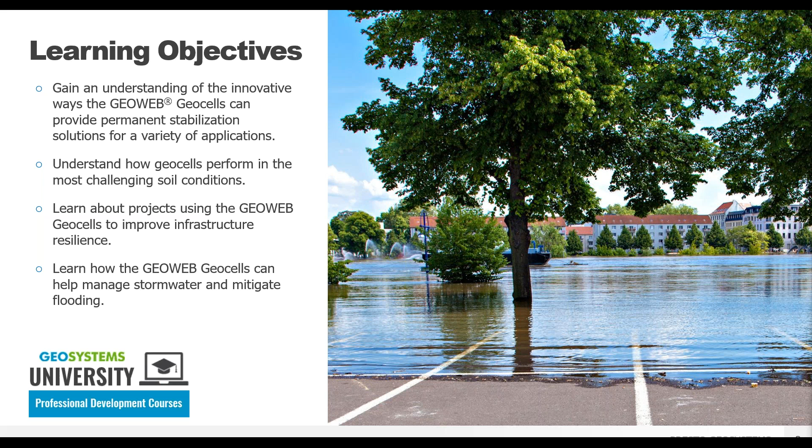Presto Geosystems offers a cost-effective and low-maintenance solution for all of these potential issues using our GeoWeb 3D soil stabilization system. In this webinar, we're going to discuss how to utilize this type of solution to address these types of challenges in your aging infrastructure due to climate change.

We operate in three main product areas: soil stabilization using our GeoWeb GeoCells, which can be used for load support, slope and channel protection, and constructing green retaining walls. We also do porous pavements, which we have both vegetated and aggregate solutions, and lightweight reusable construction mats. Today, we're going to focus on that top line using the GeoWeb GeoCells - that's where we're going to have our focus today.

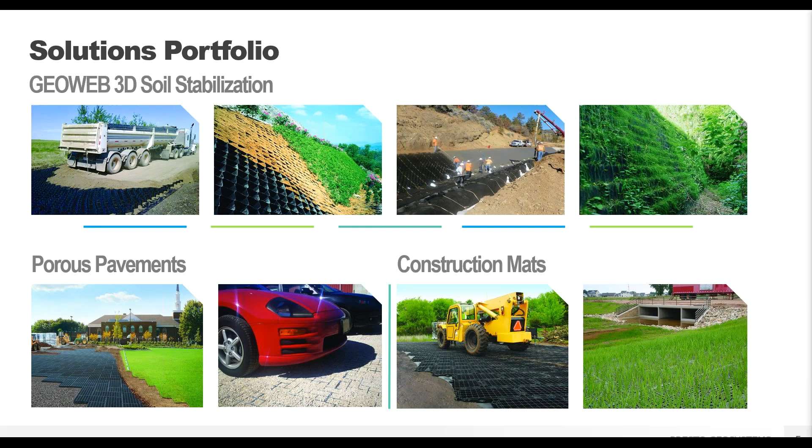We're going to cover some general information about the GeoWeb system, about that type of technology, for those who may not be familiar with this type of product. It's been around for a number of years, but it is still new to a lot of people. The GeoWeb system is our version of the GeoCell technology, and it consists of two main attributes.

The first is the cell or container size. The cells come in three diameters - small, medium, and large opening - with cell heights of 3, 4, 6, 8, and 12 inches. These dimensions will depend on your project-specific details and if you have any specific vehicle loading requirements. We can help you determine which one is going to be the most appropriate for a specific job - there is no one right answer.

We also offer 5 section lengths to best fit your project needs, to give you a little bit of flexibility to make sure that you have full coverage.

The ultrasonically welded seam is where all of the connecting points are, and it's very important to the function of a GeoCell. The stronger the seam strength, the better the performance the GeoCell will have. A strong seam allows for heavier infill material, steeper and taller slopes, and better lifetime performance.

The GeoWeb product is produced using a high-quality virgin, high-density polyethylene, HDPE resin, for consistently strong welds at cell junctions, while also maintaining semi-rigid ductile properties within the cell walls, high stress crack resistance, and overall toughness and long-term durability in any type of environment.

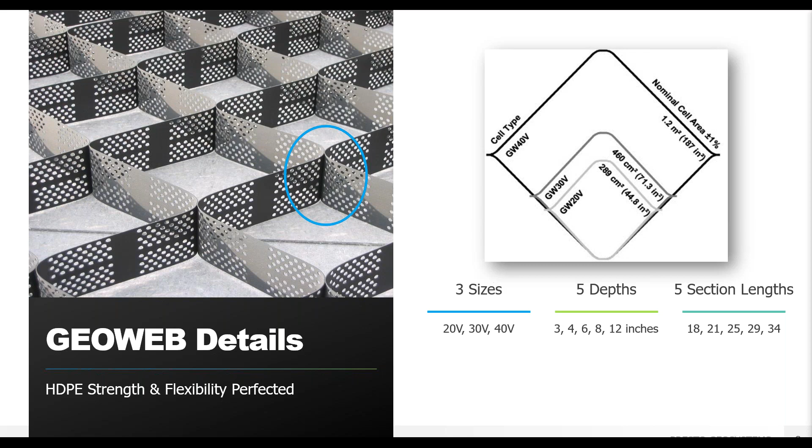Our GeoCells do not use fillers or exotic polymer alloy blends, because those can ultimately reduce weld strength and environmental stress crack resistance, and you don't want that. You want those things to be as optimal as possible. Things like fillers and polymer blends are offered in some competing products in the name of increasing cell wall stiffness, but you want to avoid that because you don't want weld failures or differential settlement. You want uniformity in performance across all elements of a GeoCell system, which is much more important than focusing on a single characteristic like stiffness alone.

So I mentioned there were two main attributes. The second attribute of the GeoWeb system is the infill material, so what you put into the container. An important benefit of the GeoWeb system is that even low-quality aggregates, sands, or certain salvaged on-site materials can be used to infill the cells. Using an on-site aggregate or sand can save significant money, material, and hauling costs.

You can also eliminate the fine content of your material when needed, since the cells provide confinement and aid in compaction of cohesionless materials. Without the fines, you can significantly improve drainage through the system and let water flow freely, preventing pore pressure buildup and potential global failure across the cross-section.

The ability to use sands or other low-quality aggregates really sets the 3D GeoWeb system apart from things like planar geogrids and geotextiles. Those products require high-quality materials with high friction angles to achieve optimal performance. With the GeoWeb system, low friction angle materials are just fine. The GeoWeb panels will still achieve their full potential even when poor materials are used, so you can have some pretty big cost savings there as well.

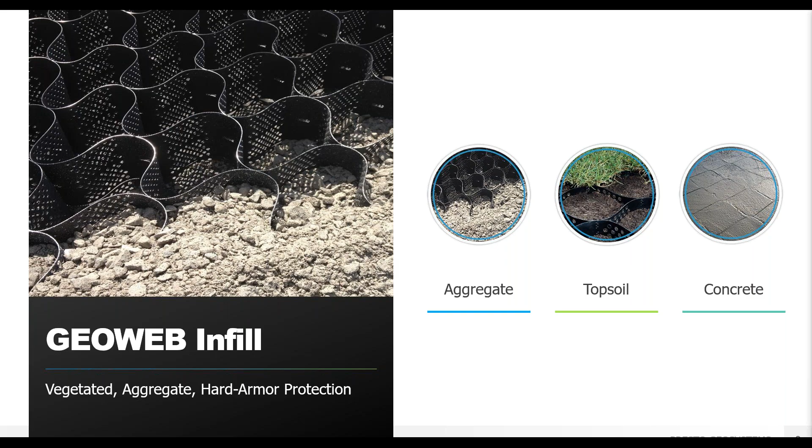So we're also going to have some system components. These are all the supporting pieces that help the GeoWeb panels protect your roadway, base layers, slopes, retaining walls, and so on. They also ensure relatively uniform performance across the whole interconnected system, protecting against non-uniform deformation and differential settlement in response to applied loads.

If we think back, I mentioned the panels, and the thing you want is full coverage. You don't want any gaps in your project area that you aren't anticipating. So to do that, you need a connecting device. We use our Atra key. It's the first component in a completely integrated system, connecting each individual panel of the GeoWeb into a single web that covers your entire project site.

It allows for faster installation of the GeoWeb panels and lasts the lifetime of the project, ensuring your roadway or slope is protected and the GeoWeb system doesn't fail under anticipated loads. The specific engineering values of the Atra key ensure the system holds up to loading over time without the corrosion seen in metal staples or the failure of underperforming cable tie systems.

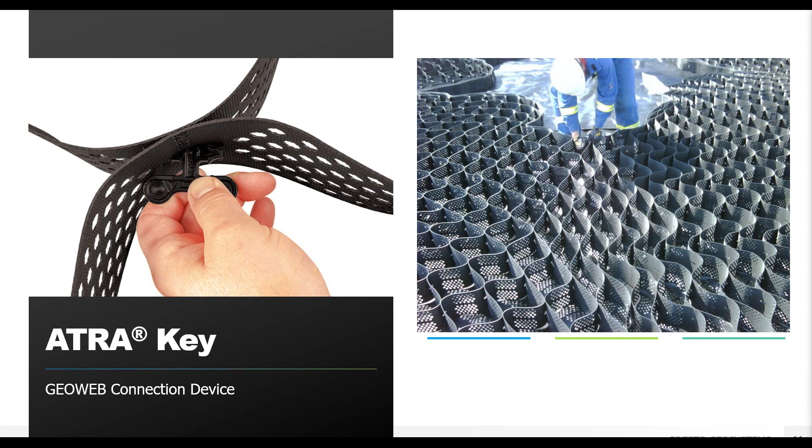There is a specific Atra key called the Atra wall key for a completely integrated earth retention system. This is what we use to connect adjacent GeoWeb retaining wall sections through the material eye slot. This is specific to retaining wall applications, whereas the standard Atra key is for your load support, slope, and channel protection applications.

The Atra wall key includes an integrated washer at the base of the handle for coverage and has frictional barbs for improved interlock with the GeoWeb sections. It's formulated to withstand weathering and ultraviolet radiation, which means it can be exposed to the environment, it doesn't need to be buried or hidden. It won't corrode or photodegrade, even in harsh environments. Securing sections with the Atra wall key is a lot faster than using metal staples or zip ties, requires no special tools, and can be completed by a single installer in one easy turn.

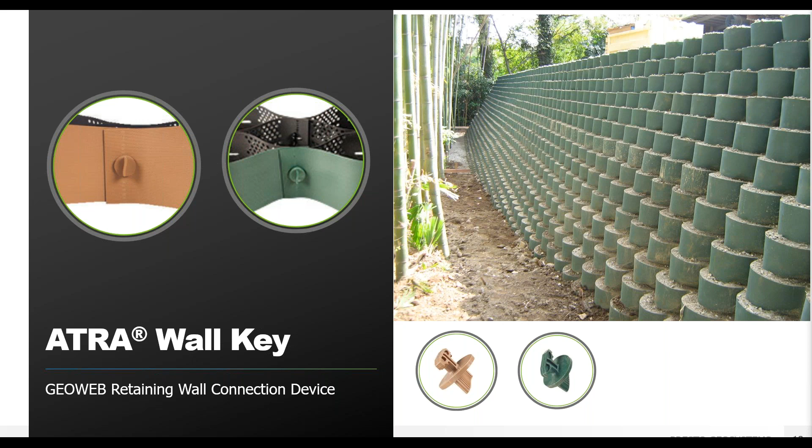So that's how to connect all of the individual panels. But if you need to go on your slope, if you have your channel with some side slopes, you're not necessarily going to have a flat geoweb on the slope. So you're going to need anchorage to hold it in place so that it doesn't just slide all the way down your slope and therefore not protect anything.

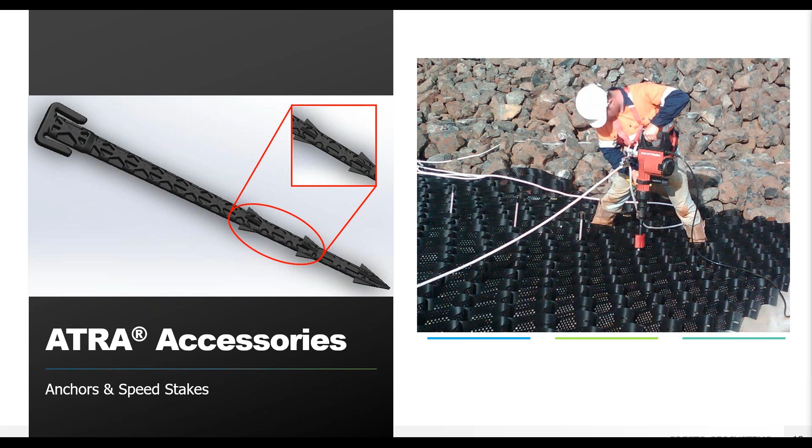But a lot of times you are gonna have steeper slopes. You can have slopes all the way up to a 1-to-1, so 45 degrees, sometimes even steeper than that. And also sometimes you are going to be over a surface that can't be punctured. So if you have a geomembrane liner down on the slope, you obviously aren't going to want to drive a stake through that. It's going to defeat the purpose of the liner.

So in those cases, you're going to use a tendon anchored system. And we have our Atra tendon clip, which is a load transfer device to carry the load from the heavy infill materials that you would choose to the tendons and then up to a crest anchorage system. So only the Atra tendon clip is specifically designed to fully transfer safely and securely the forces placed on a geocell.

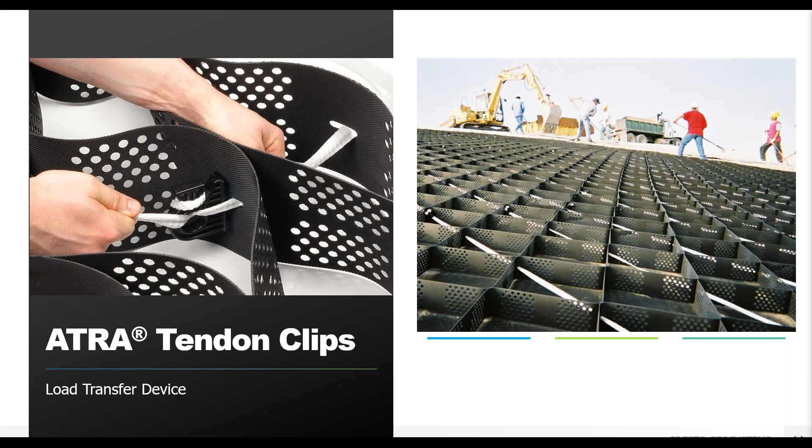Every accessory that we have has been designed and tested specifically to work together with the GeoWeb panels so that we can go from problem to design to construction solution with a system that really models and replicates real-world forces. And so in order for a geocell system to perform uniformly, which is kind of the key word that I want you to take away from all of this...

It's critical to have both factory welded junctions, those internal points, and then also field joined junctions that connect the individual panels, so the mechanical junctions. And those have to perform at a level that's commensurate with the cell walls. So it's three primary elements: the cell walls, the internal junctions, which are those ultrasonically welded seams we looked at, and then the connectors, those Atra keys, we talked about those as well, must perform uniformly as a complete system.

Therefore, an incremental improvement in a single characteristic, such as cell wall stiffness, is only going to be valuable if a complementary improvement has been made in the other components within a system. So you can't just prioritize one over the other.

The GeoWeb system is going to be manufactured with that high quality virgin HDPE. Our proprietary formula has stood the test of time for more than 40 years, and it's going to be more than adequate for pretty much all typical sites. It can have a durability of greater than 50 years, with lab testing indicating more than 150 years without degradation, even at full exposure to the elements.

So we stand behind our numbers so that you can deliver certainty in a solution as you build with materials that you can trust. Additionally, for those who are in the United States, the GeoWeb and all of our products and accessories are 100% made in the USA. So if you are working on something like a federal project that has Buy America or Made in the USA requirements, all of our products do meet those standards. Just something to keep in mind.

Okay, so now we're going to move on to discussing our soil stabilization capabilities with the GeoWeb system, specifically how they can relate to load support applications. Presto Geosystems offers solutions for many different types of road and highway applications, load support for both unpaved roads, road shoulders, and base stabilization underneath paved surfaces.

Plus, stormwater control is going to be possible when using the GeoWeb geocells through roadside ditches, drainage channels, and culvert outfalls. So the purpose of cellular confinement is very simple: it stabilizes the movement of unstable soils, both horizontally and vertically. The weaker your subgrade conditions, the more practical it becomes to insert the GeoWeb system into the design.

It's an engineered system integrating multiple types of geosynthetics with the best method of confinement and subgrade stress reduction in the industry. And so although today's discussion is going to focus on the GeoWeb system for roadway infrastructure, other load support applications include things like intermodal yards for heavy equipment and container storage, and rail ballast reinforcement for railways.

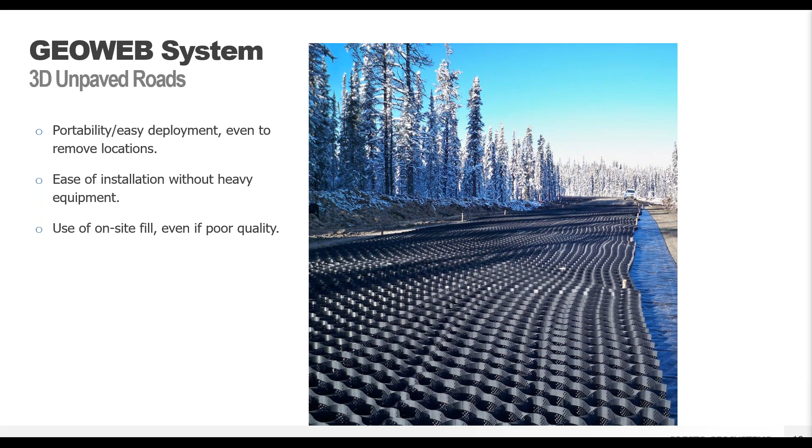So there are lots of applications that we're not specifically talking about today, but that we do cover.

So the GeoWeb 3D system works like this. When a vertical load is applied, the active earth pressures in the loaded cell push back against the passive earth pressures in the adjacent cells to form a stable system. Being confined, the soil responds passively. The infill is limited in its movement, represented by the yellow arrows in the center, and the cells adjacent to the loaded cell provide passive resistance, shown by the red arrows pointing back in. The load is dispersed over a greater area in the lower layers as each cell helps support the one around it.

The GeoWeb cell walls also transfer hoop stress, which is important in keeping the system intact and creates what we call the mattress effect. The strength of the seams around each cell, the ultrasonically welded seam we talked about earlier, plus the material properties of the individual strips, the HDPE resin, and the connection method, those ATRA keys, are all important factors in determining how the GeoCell system can improve load bearing capacity. Strong seams, semiductile resin properties, and integrated connections are all critical to a well-performing system.

The GeoWeb system plus its accessories are specifically designed to work together as an effective, permanent solution for roads in soft soil conditions. In a load support scenario, vertical deformation can only occur through compression or compaction of the soils, or through lateral movement of the soil particles. By spreading out the load, the classical granular fill approach can reduce the compaction of near-surface soils, but only with the cellular confinement of the GeoWeb panels can you assure there's no lateral shifting leading to ruts. This mattress effect reduces the stress reaching your subgrade.

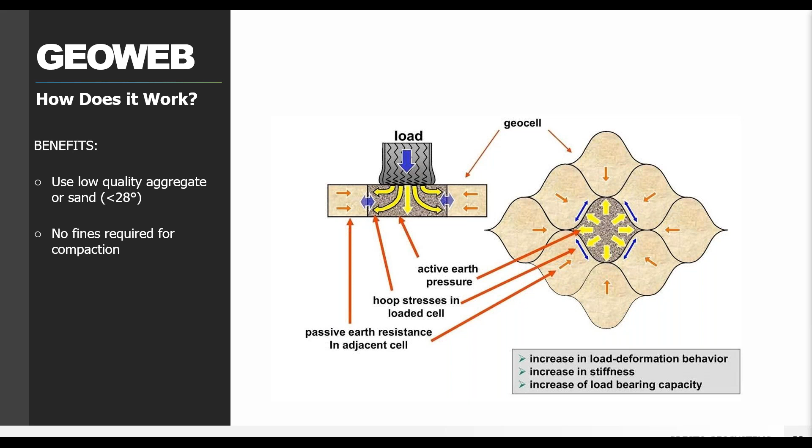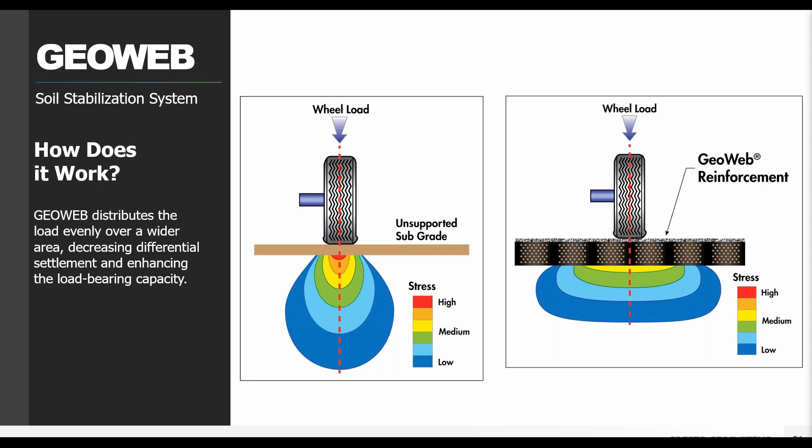And here you can see that. So the stress is on the subgrade, with the unsupported subgrade on the left, and the GeoWeb reinforced system on the right. Notice the complete elimination of the highest stresses at the surface with the GeoWeb reinforcement. The stresses are reduced and distributed over a wider area, and this mattress effect reduces the stress reaching the subgrade, leading to a significant decrease in deflection and rutting.

By eliminating lateral particle movement, because the infill material is confined within the cells of the GeoWeb panels, the GeoWeb system can stabilize the surface, reducing or even potentially eliminating the need for constant surface maintenance.

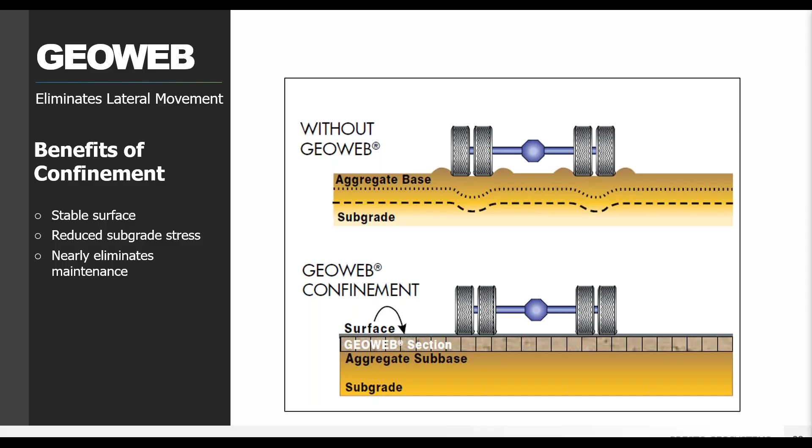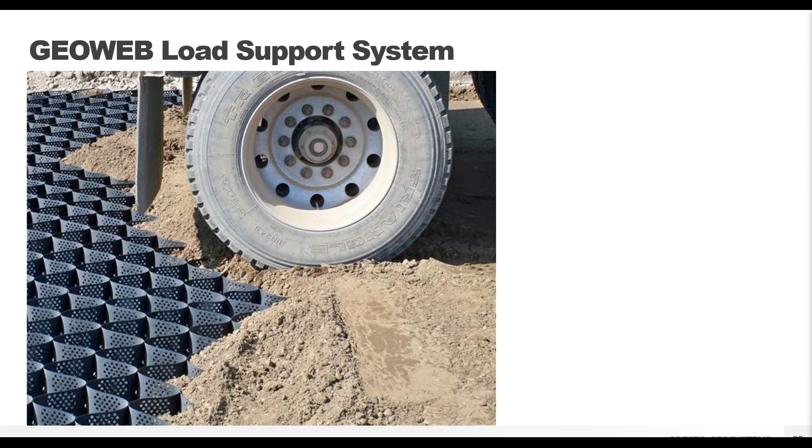The GeoWeb system is often compared to 2D geotextiles or geogrids, and they do start with the same concept. However, due to the 3D nature of the GeoWeb system, it has that defined depth. The integrated infill geosynthetic system acts as a composite layer where lateral earth pressures are mobilized and transferred across the three-dimensional network of interconnected cells.

So again, mattress effect. Because of this phenomenon, lower quality fill materials, like sand or salvaged material from your site, can be beneficially reused, eliminating the need to import expensive aggregates as required with geogrids. The GeoWeb system also uses a thinner cross-section. Typically, a 6-inch GeoWeb system is equivalent to a 12-inch geogrid system, which can require 2 or more layers of geogrid depending on how soft the native soil is.

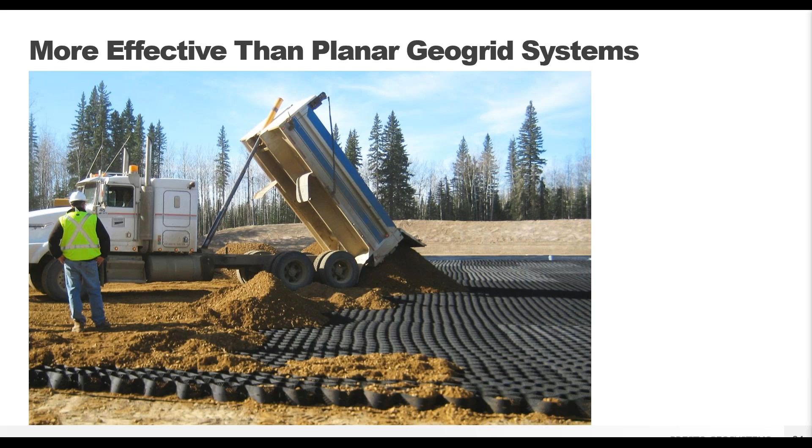We can also eliminate fines when desired, since the cells provide confinement and aid in compaction of cohesionless materials. Without fines, you can improve drainage and let water flow freely. Additionally, geogrids do very little to actually stabilize the surface of your roadway, so they require significantly more maintenance since the aggregate is loose at the surface and can get pushed around by vehicle passes. That's exactly what the GeoWeb system prevents with its confinement.

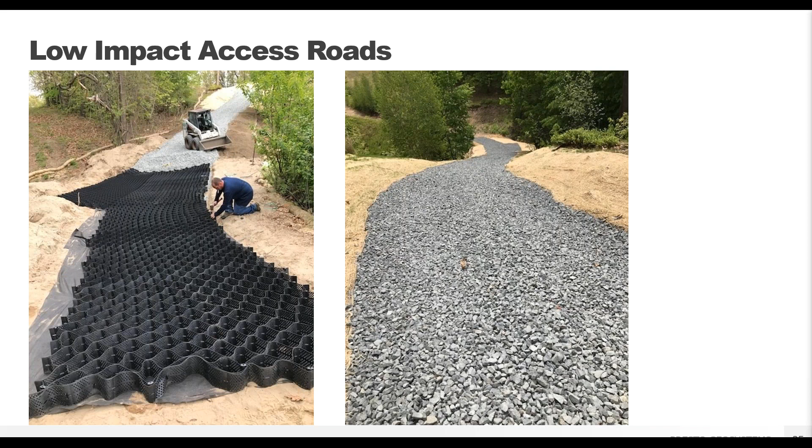Continuing with the theme of unpaved gravel road surface applications, washed or clear stone can be used in the GeoWeb system, allowing you to build stable, permanent, low-impact development access roads. Site access roads, both temporary and permanent, are very common applications for the GeoWeb system. Heavy vehicle loads can drive on the GeoWeb system immediately after infilling to finish construction, so it's a pretty big time saver. With the GeoWeb panels and a woven geotextile underneath, which is what you see here, you can actually bridge wet, soft ground, creating access roads with little to no disturbance.

Saturated soils usually can't support any type of vehicle load, and woven geotextiles can't do it alone. They do add additional strength to the system, and they won't get clogged by your subgrade material, so they still allow for water movement to go through freely. The clear stone infill combined with the perforations in the GeoWeb cell walls allows water to flow both vertically and laterally through the system, limiting impact in sensitive environmental locations in ways that a paved asphalt or concrete road can't.

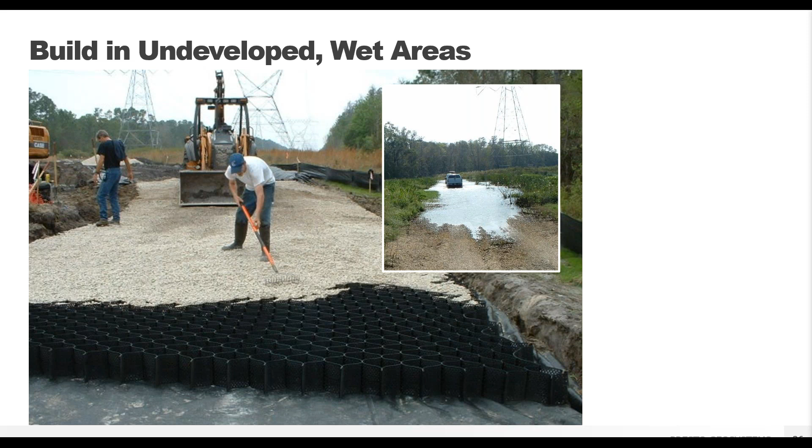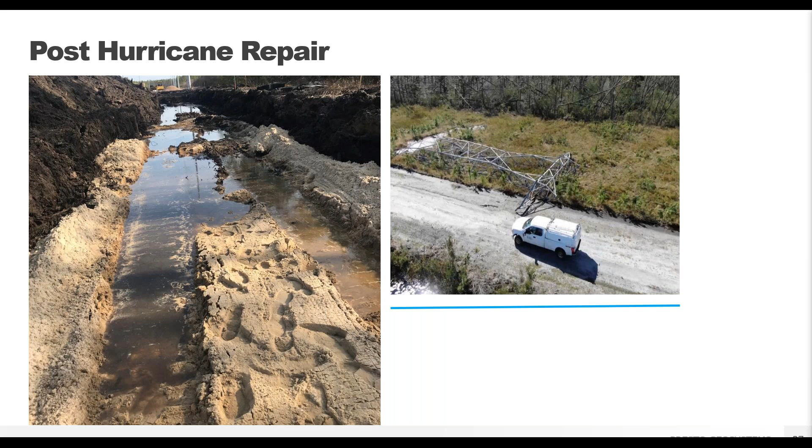This was a project through the Duke Energy system in Florida to install new transmission towers through wetlands. High winds from Hurricane Michael had demolished over 100 towers in this line, all of which had to be restored over extremely soft subgrade. You can see how easily people were sinking in with deep footprints—imagine vehicles going through. So the GeoWeb system was used for access and maintenance roads, as well as building up pads around each tower.

The saturated sand really couldn't support any type of vehicle loads on its own, so a combination of woven geotextile and the GeoWeb system was used. This allowed water to still flow freely through the wetland system, limiting environmental impact. We were then able to use sand from the local site—low quality material that you typically wouldn't get to use with a GeoGrid, but you can use with the GeoWeb system. It was easily sourced and transported to these remote locations without needing to bring it from far away from a batch plant.

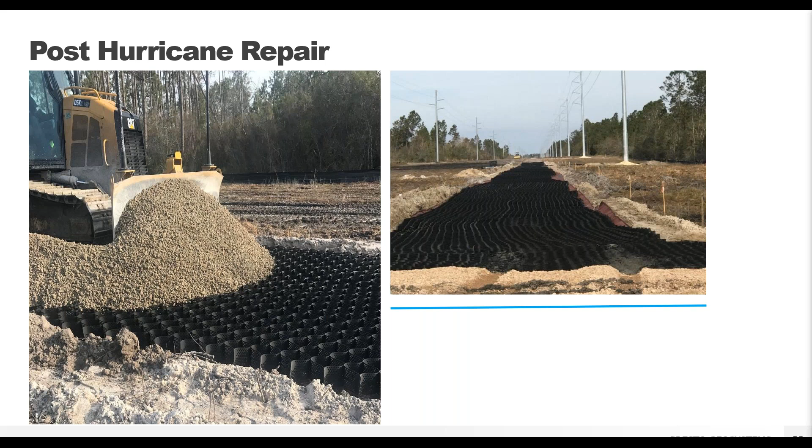Once the panels are filled in, both wheeled and tracked equipment can drive over the GeoWeb system quite easily, even when the infill material is sand, which you normally wouldn't be able to do. Again, you can see how the GeoWeb panels act as their own access road—just keep filling up the cells in front of you. You don't need to build temporary roads around it; just use what you already have.

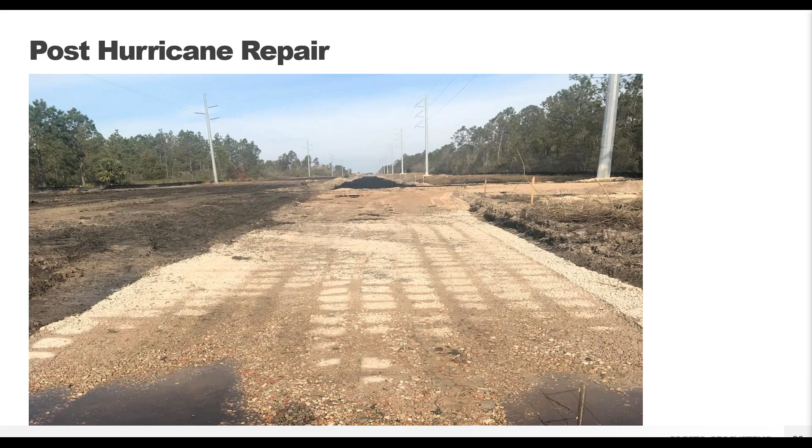Now we're going to move on to embankment stabilization using the GeoWeb system. Many times slopes and embankments need to be stabilized after or in conjunction with road and highway construction. The GeoWeb system for slopes can be filled in with a couple of different materials depending on your project needs. Topsoil with vegetation is probably the most common, but sometimes vegetation is not appropriate, so you can also use stone or concrete as your infill options.

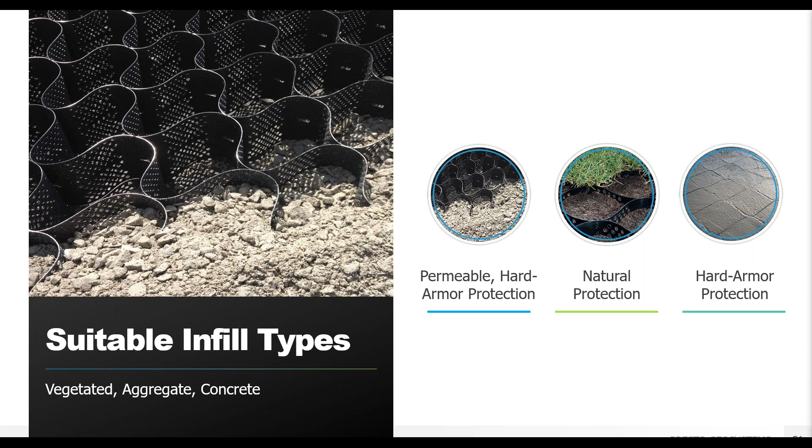As shown earlier, there are a couple of different options for anchoring. You can use stakes if you have a shallow slope, or tendons if you have a really steep slope, or if you've got a geomembrane that you can't puncture. When using tendons, you have to have crest anchorage, typically a dead man pipe or earth anchors. But if you have infrastructure right at the crest of your slope, such as a building or roadway, you can also anchor to that infrastructure if it can support additional load. That's very project specific, and we can help you determine what's most appropriate for your site.

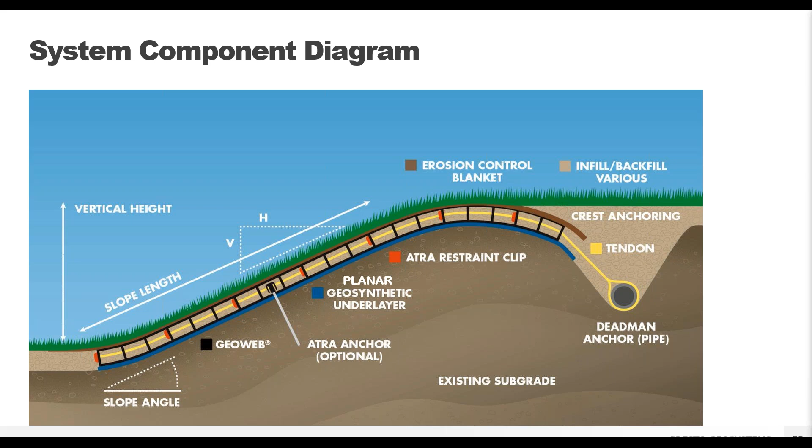So the GeoWeb panels work in multiple ways to protect your slope surfaces. It prevents significant movement of the soil by confining it to individual cells. By separating the soil into those smaller segments, the system resists mobilization of the entire slope face due to hydraulic loads and prevents soil erosion.

It's important to reiterate that proper installation of the GeoWeb system includes embedding the panels into the crest of the slope. This prevents water from flowing beneath the panels and undermining the system. You don't want rills or gullies forming underneath the panels where you can't see them, potentially leading to failure.

The system provides a way to fully vegetate slope surfaces that otherwise could not support sustainable plant life, increasing overall slope stability by interlocking with the vegetated root zone. Stone or concrete materials can also be confined within the GeoWeb panels, again on slopes that might normally be too steep to allow for natural vegetation or natural stone slopes alone.

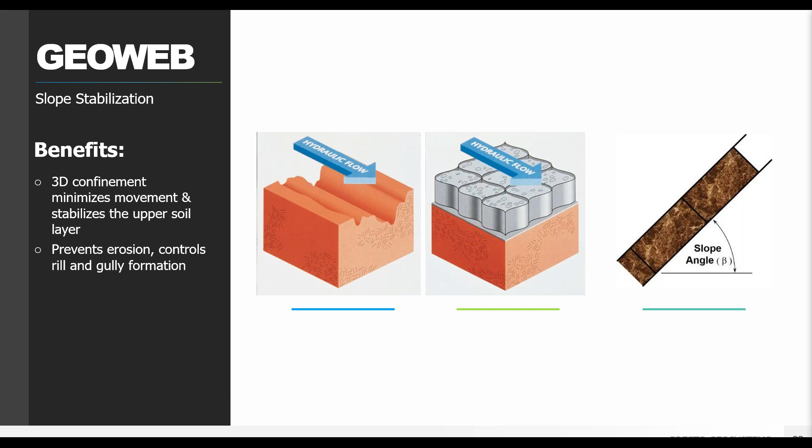Vegetated slopes are probably the most popular option because they can result in the most attractive slopes, and typically they would have little to no maintenance.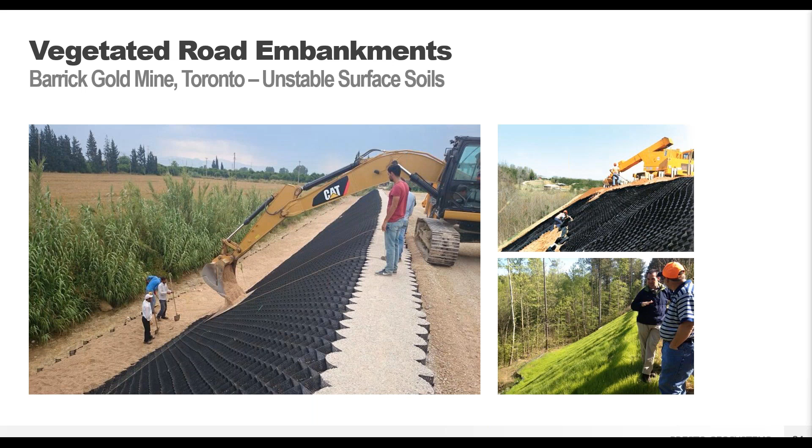Always a positive. So this was a vegetated slope over an unstable soil slope at an active gold mine in Canada. With variable slope lengths and face angles, it required a flexible solution. Plus, an access road was going to be built on top of the slope, where you see the excavator here. So the slope had to be stable enough to support the expected traffic live load. A couple different things needed to be considered.

Here you can see that there were also space constraints at the top of the slope in the form of that access road, plus potentially an access road at the base of the slope.

You can also install things like fences, rail posts, and other small infrastructure directly through the GeoWeb panels. That's a nice bit of flexibility and customization that you have with the GeoWeb system that you wouldn't necessarily have with other types of systems.

Plus, now you have a steep slope that otherwise probably wouldn't have been able to withstand on its own, fully vegetated, and it's going to withstand the test of time and heavy rain events.

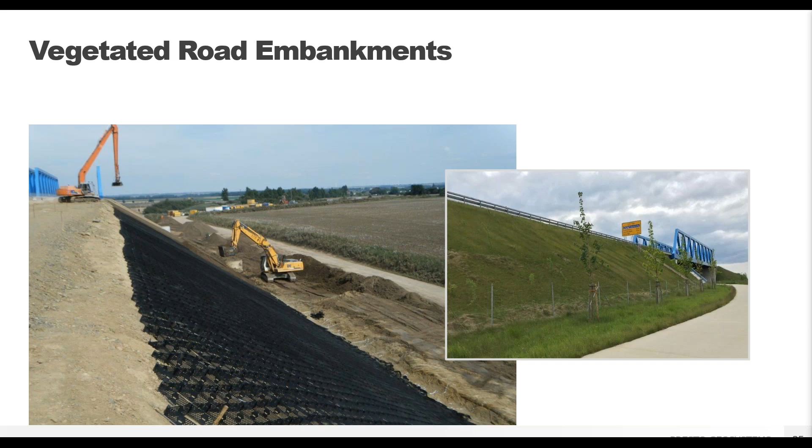This was a slope alongside a road in Ohio, which shows a pretty common problem solved with the GeoWeb system. Erosion and washout of soil slopes onto your road surface is going to be a problem in many locations.

Covering the slope with the GeoWeb system and then filling it in with topsoil allows for a vegetated slope without the concern of constantly having to replace the soil after storm events.

We do recommend some sort of surface protection, such as hydroseeding or using an erosion control blanket, be used over the GeoWeb panels until vegetation has had a chance to grow. It just gives you a little bit of flexibility until that grass starts coming in.

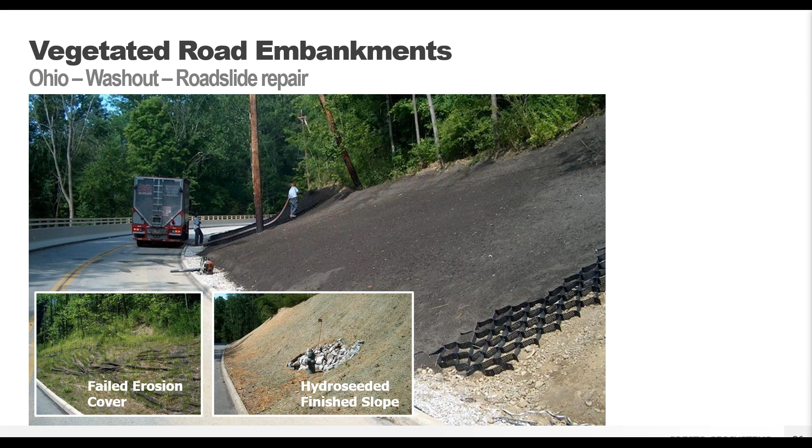The sheet flow off the roadway can cause sloughing of large sections of the upper topsoil layer, causing deep rills or gullies and preventing vegetation from taking hold.

The GeoWeb system holds that soil in place while allowing the water to run over the surface. So no more gullies, and now vegetation can form those deep roots to help further stabilize the soil.

Sometimes you just have so much rain, the rain events are so common, vegetation never got a chance to establish itself, even if it normally could have.

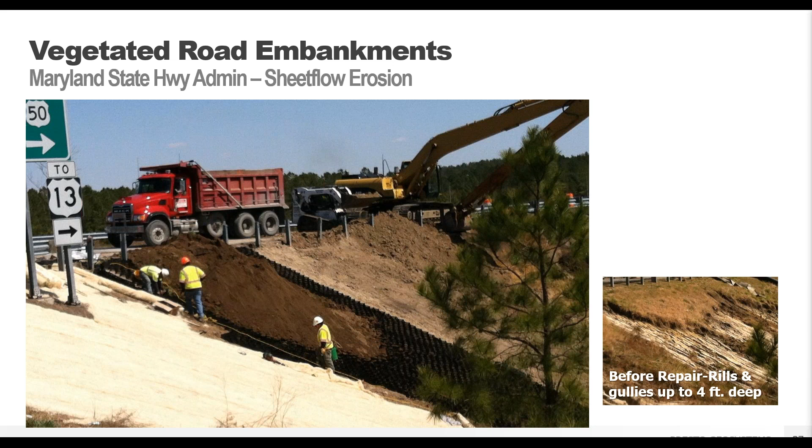With the GeoWeb system, it gives that extra strength and protection against that water flow movement, letting it grow and really get those roots deep down to get you a nice stable slope.

The GeoWeb slope protection system allows for steeper slopes to be created than normal without erosion concerns. The system can be installed quickly and vegetated quickly, so there's not going to be a long construction time that might shut down your important roads.

Ease and speed of construction are some important features of the GeoWeb system that everybody appreciates.

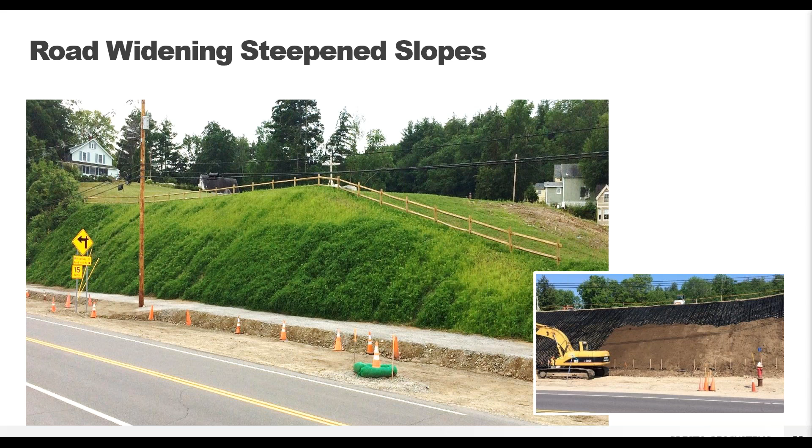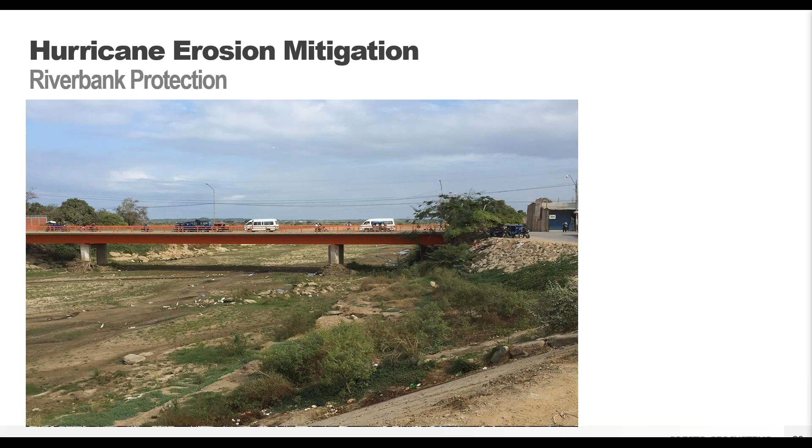During a brief dry spell, the river banks were cleared and regraded to allow for the installation of the GeoWeb slope protection system. The system also provides excellent resistance to sheet flow, eliminating the formation of rills and gullies, especially in areas of concentrated flow over erosive soils.

In many areas of this particular project, protection of the slope surface allowed for the construction of steeper embankments with less horizontal footprint, thereby conserving valuable land space. Contractors were able to install about 2.4 million square feet of the GeoWeb system along the compromised riverbank slope.

Installation rates are typically going to be around 1,300 square feet an hour for a crew of 4, including your operator. At the Zarumilla project, the contractor further optimized installation rates by pre-staging sections and assembling the system at the crest before expanding the panels down the slope face.

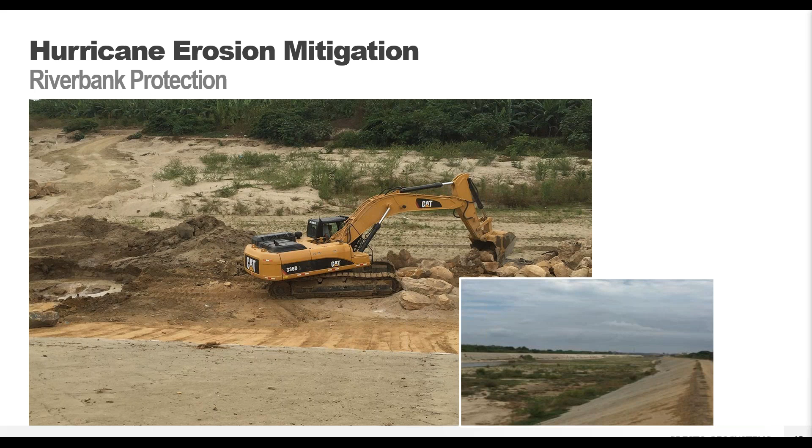The GeoWeb shoreline protection system filled with concrete was selected to protect the Zarumilla riverbank against future storm events. The GeoWeb system with concrete infill provides economical hard armor protection of slopes and channels exposed to high flow velocities and high shear stresses.

The system has been proven to withstand flow velocities over 36 feet per second, or about 11 meters per second, and shear stresses of around 21 PSF, or about 1 kPa, outperforming things like riprap, gabion baskets, and other conventional hard armor strategies. The quality, surface finish, and thickness of the concrete can be selected to meet your specific design needs.

The concrete-filled GeoWeb system comprises flexible, poured-in-place sections that are more economical than articulated concrete block systems (ACBs), and they don't require specialized equipment to install.

The GeoWeb shoreline protection system is quick and easy to install and doesn't require extra training or specialized needs. And the complete system is going to be formless and poured in place, eliminating the need for conventional concrete formwork and rebar reinforcement while ensuring consistent pour depths.

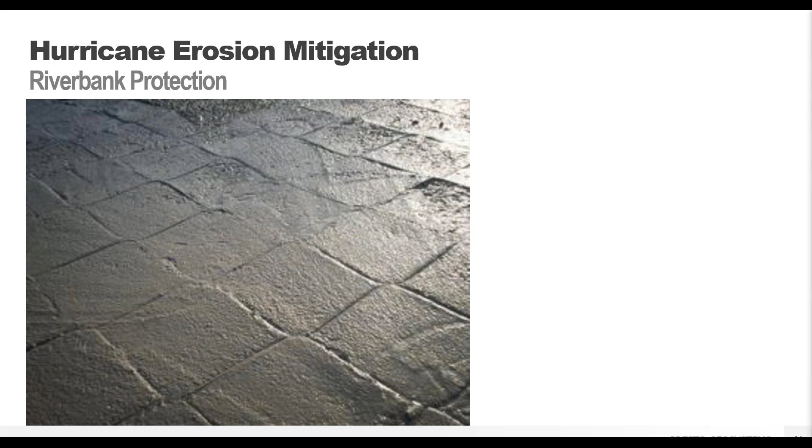The whole project took around 4 months to install, including the excavation work. The system becomes a flexible concrete slab that conforms to minor subgrade movements, prevents uncontrolled cracking, and reduces the potential of piping or undermining through the slope faces.

This work can also be integrated into existing infrastructure within the area. The GeoWeb protection system was placed up against bridge abutments and formed around culverts and drainage areas. So you don't need to redesign what's already in place. You can work with the roads and bridges and landscape that you already have to create a solution.

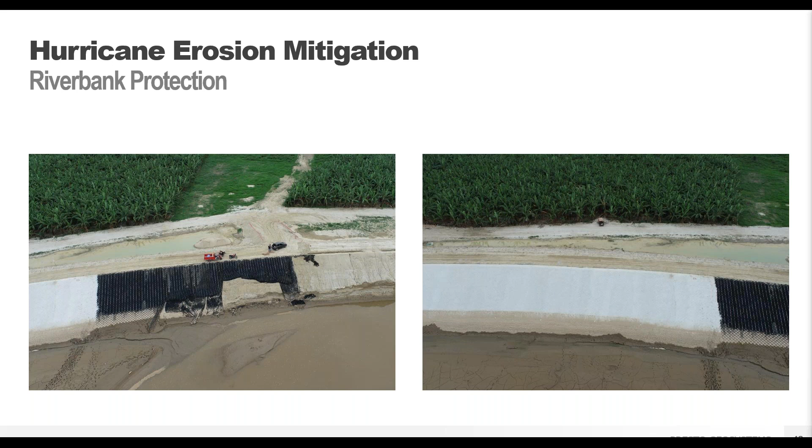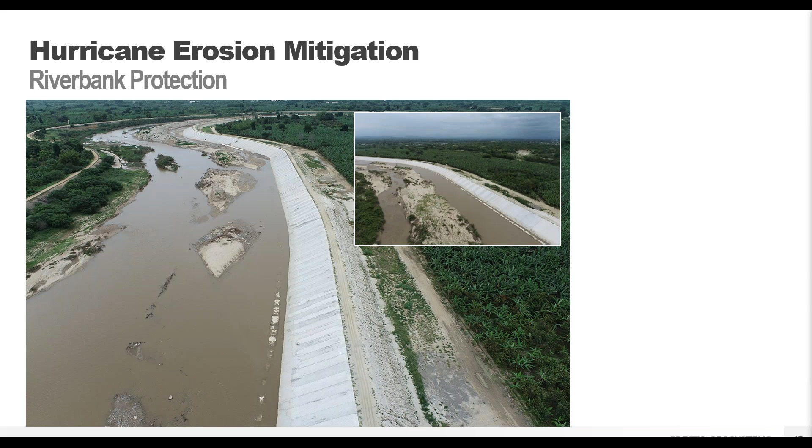And with concrete, it is going to be a permanent solution, even with the more extreme weather events in the region. Plus, the GeoWeb shoreline protection system is going to be performing to expectations and will provide some much needed protection to the Zarumilla River. The communities that depend on it for the next several hundred years really are going to be able to withstand through many major storm events. So definitely a good peace of mind.

However, if global stability is going to be a concern, or if you do have banks steeper than 65 degrees, so pretty steep, slope protection isn't going to be sufficient. You are going to need to have a retaining wall.

The GeoWeb panels can be stacked vertically on top of one another to create a gravity retaining wall, and GeoGrid tieback reinforcements can be added if necessary, similar to MSE block or gabion basket walls.

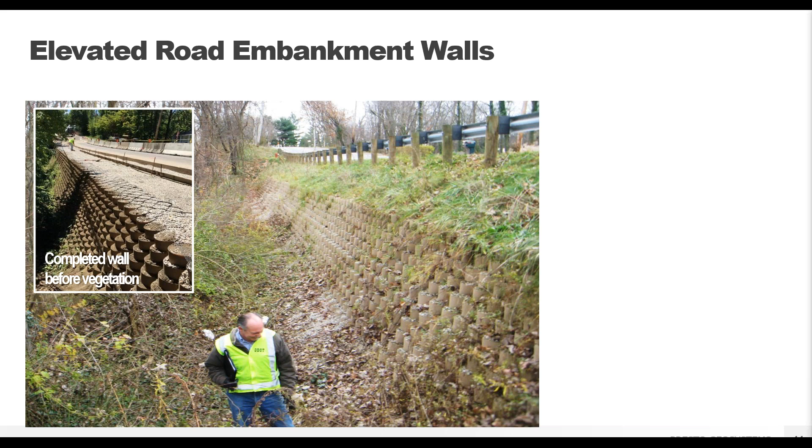The walls can be filled in with topsoil in the front cells to create a living green wall and can be built to support vehicle or building loads.

So there are 2 different options with walls when you consider the cross section. One is going to be gravity walls. You're going to have longer pieces of GeoWeb at the bottom, shorter as you go up, sort of a triangular option. And then the weight of the infill GeoWeb panels provides the retention.

Or you can have GeoGrid reinforced walls. The GeoGrids provide retention, and then the GeoWeb panels function as a fascia alternative. So there's going to be some reasons why you would choose one or the other.

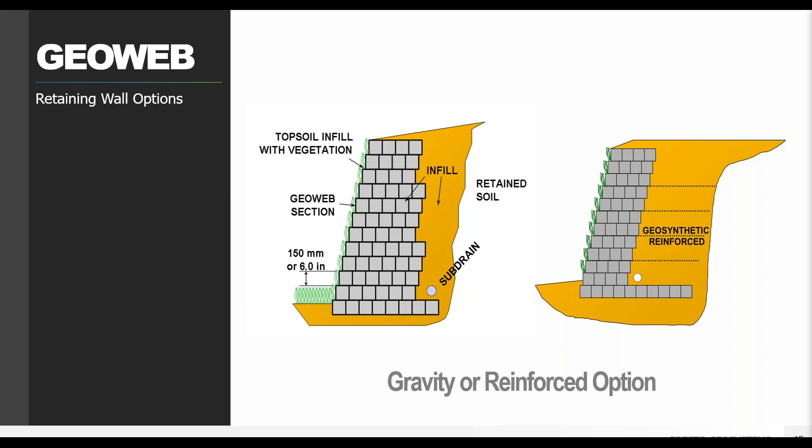GeoWeb walls are the preferred solution when dealing with poor soils with significant settlement potential. A GeoWeb retaining wall saw a major earthquake event resulting in sliding of the whole slope area. The GeoWeb wall system sustained no damage, but the concrete flumes were broken beyond repair. A rigid concrete MSE wall would have been damaged in the same way, potentially leading to catastrophic failure and damage to infrastructure at the top of the wall. Without the concrete MSE wall, by using the GeoWeb wall, you were able to avoid all of that.

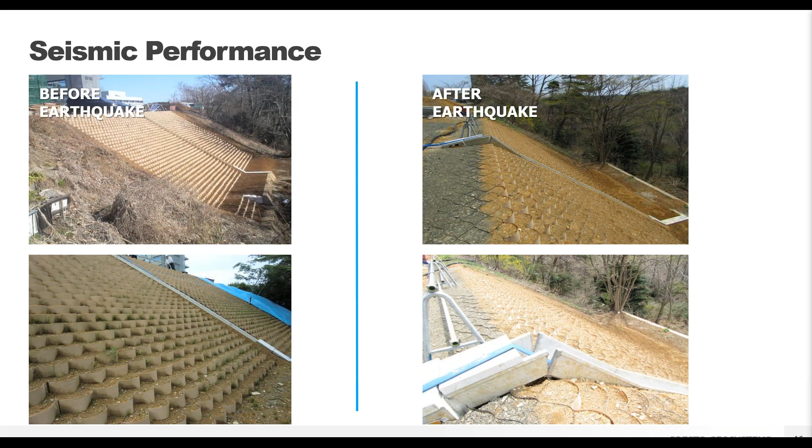This was an Ohio DOT project with a 20-foot high wall constructed to keep a rock face from further erosion. The GeoWeb system is the fascia along the wall face that helps protect the road without taking up a lot of horizontal space. This is a great option if you have unstable rock walls or steep soil slopes in seismically prone areas. The GeoWeb wall can support and maintain the wall face during normal times, and after a good ground shake, it's still in place and can help prevent rockfall or landslides from compromising your roadway.

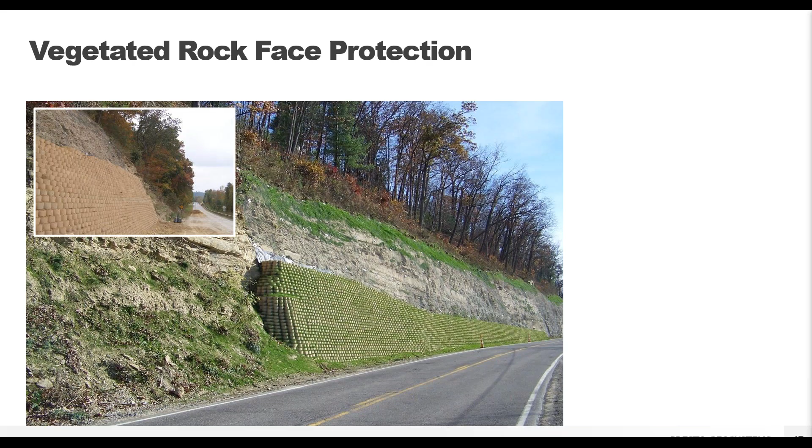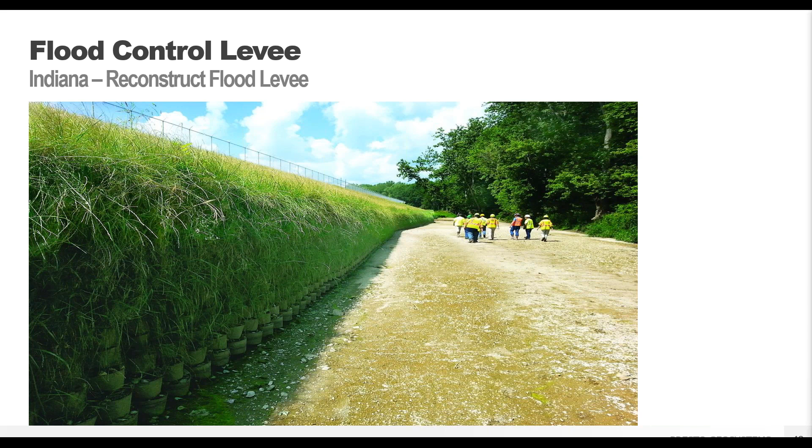The GeoWeb system works great along shorelines of stormwater channels. Placing the panels along a shoreline can help prevent erosion due to water movement or wave action. This project was along a stormwater diversion channel that helps move hurricane waters. During hurricane season, the channel floods and could be severely eroded on the channel side slopes each time, and there's infrastructure on each side of the channel that you need to keep safe. So it's really important to keep the channel within its banks, and to do that, we use the GeoWeb system.

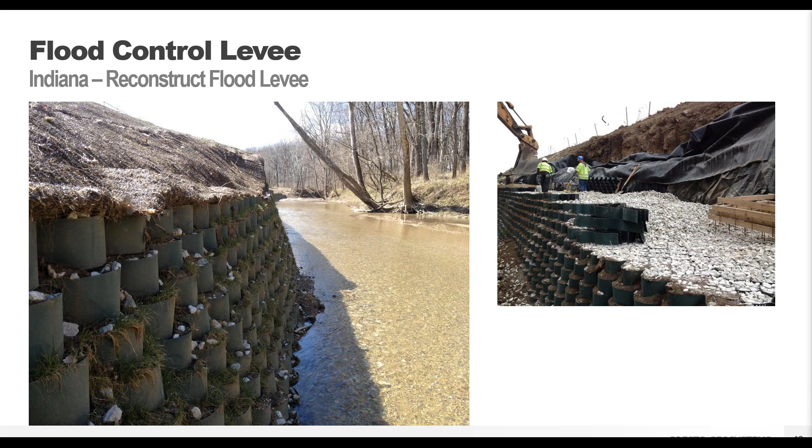Above the GeoWeb wall, you can also have just your standard grass slope so that you can minimize the amount of wall building required. Build enough to contain your 100-year, your 1,000-year, hopefully no more than that, storm events, and whatever your location requires, and then go back to your regular grade projects with no problem. So you don't have to build a massive wall just because you need the height, even if you don't need that much height for your water. The flexibility of the GeoWeb system gives you a lot of possibilities to play with so you can have a customizable project for your specific needs.

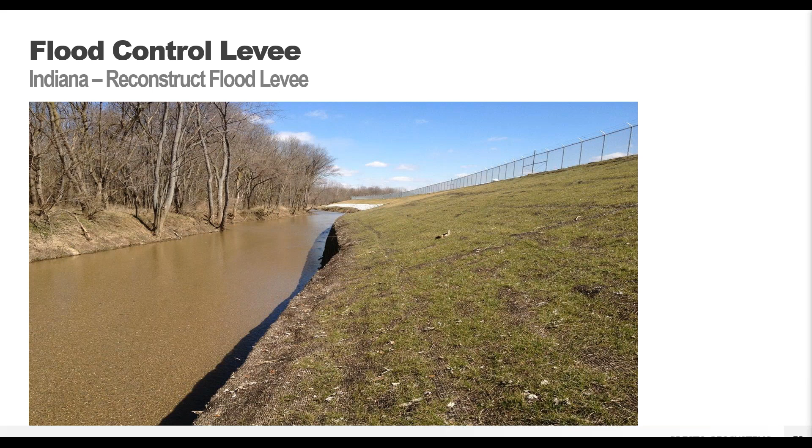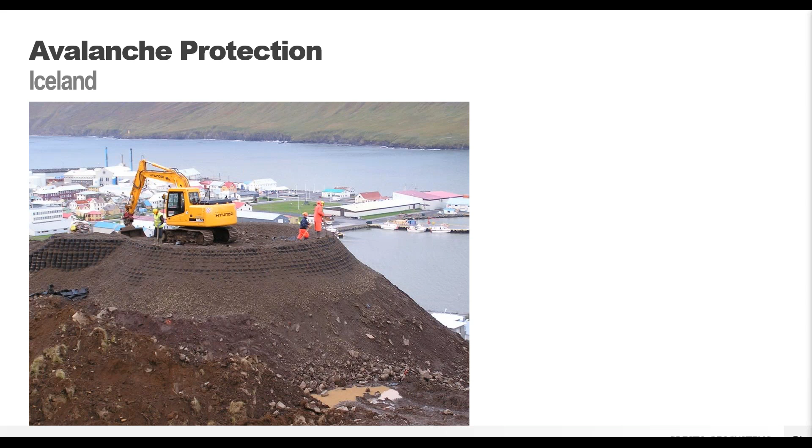You can build them also as dikes or water containment ponds, that sort of thing. So if you want to create a new channel from a flat area, you can build up these freestanding GeoWeb walls. The wall had to be built so it would protect the majority of this Icelandic town from the most anticipated avalanche direction. The GeoWeb wall curved and moved with the landscape.

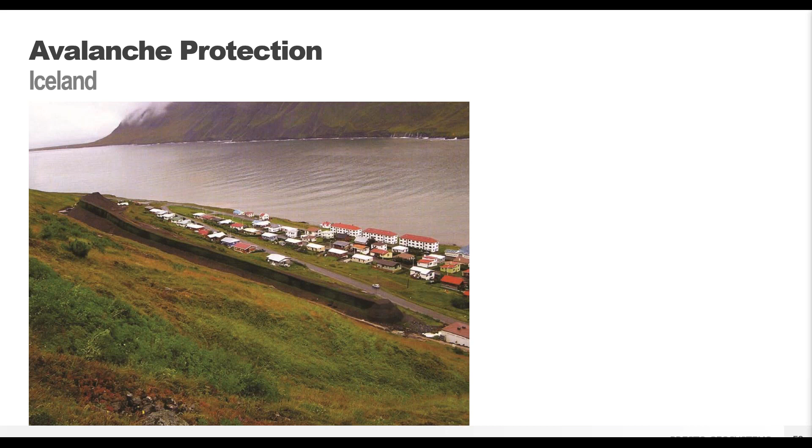The internal strength of the GeoWeb wall is enough to withstand that first huge impact of snow, and the structure had to be high enough to allow for significant buildup of snow during an avalanche event. Plus, access roads were built around and on top of the GeoWeb wall to make sure the structure stayed clear of obstacles and could be cleaned up after an event.

And finally, you can start seeing it grow some grass here. It's going to get green, look a little more natural. Eventually, all that black plastic is going to be hidden from view.

And now the town has a permanent solution for protection of their own extreme weather challenge. So obviously not everybody is going to be in avalanche zones, but there are definitely communities that are, and this is an interesting solution that you could choose.

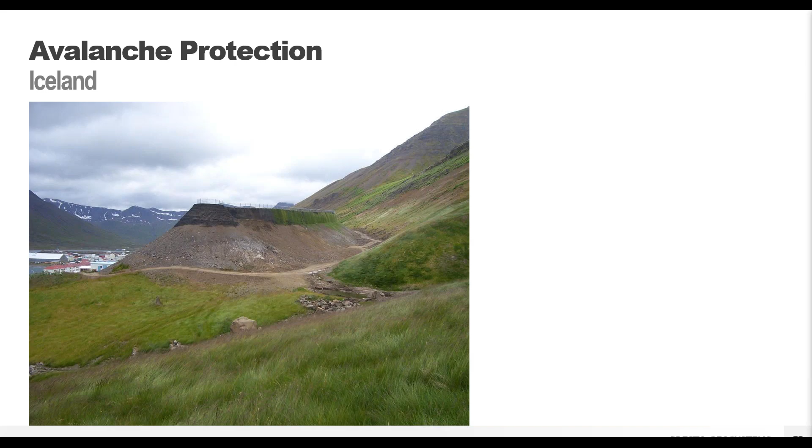Our last topic for today using the GeoWeb system is going to be for stormwater control, for mitigating flooding after storm events, even heavy storm events such as hurricanes.

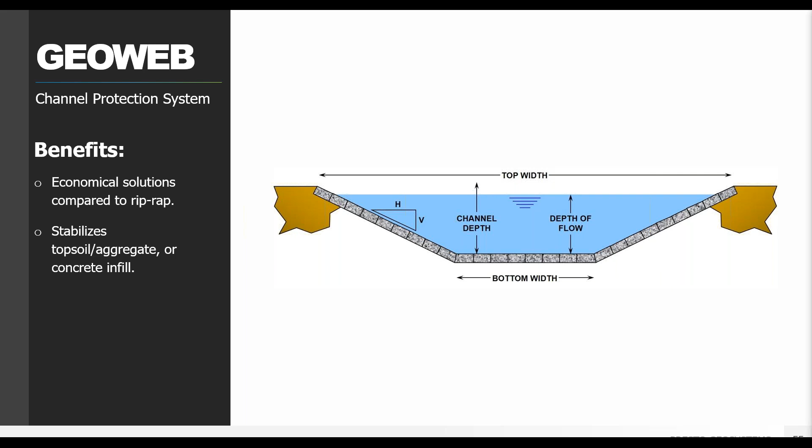The GeoWeb channel protection system is really similar to the slope protection system, just covering either entire channels or single embankments. You can have continuous or intermittent flow, low to high flow, and a variety of channel dimensions, so you have a lot of flexibility with the GeoWeb system. It's also going to be much more economical than solutions that utilize large riprap stones or heavy gabion baskets, and several different infill material options are available to meet any channel flow needs.

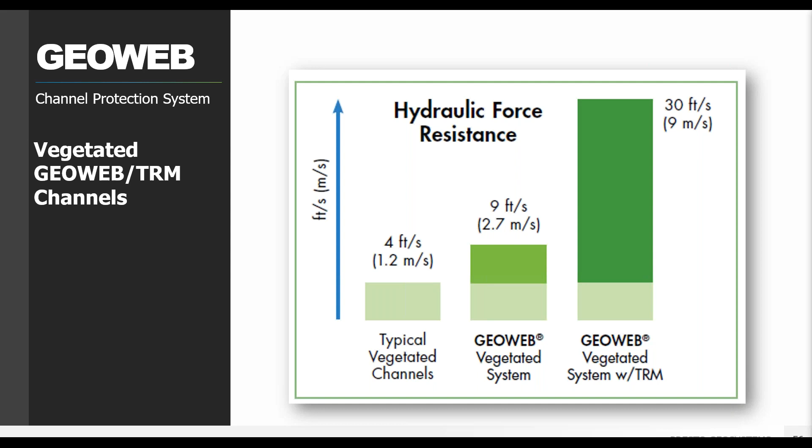We had extensive research performed at Colorado State University to show how the vegetated GeoWeb system performs in channel conditions compared to heavy riprap stone. What we determined was that when paired with a turf reinforcement mat, a TRM, the GeoWeb and TRM system can resist extremely high flows, allowing for velocities up to 30 feet per second and really high shear stresses. This is pretty significant compared to a typical unreinforced vegetated channel, giving a lot more flexibility without needing to go into a hard armor solution if you don't want to.

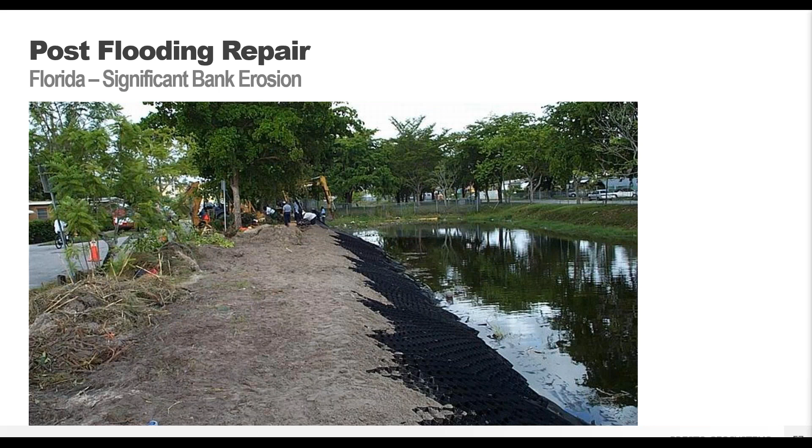The GeoWeb system works great along shorelines of stormwater channels. Placing the panels along a shoreline helps against erosion due to water movement and wave action. You can see how it was placed on these stormwater channels, and how you can use it to help keep the channel within its banks even during heavy storm events.

The GeoWeb panels are placed both above and below the average water line for this type of project. The panels need to go below the water line to ensure they don't get lifted up due to wave action, and you can then protect the entire shoreline all the way to the stable channel bed.

The area does not need to be de-watered for this type of installation—you can actually install it while wet. The GeoWeb panels will initially float, but then you anchor them down in place, typically with stakes along the slope face to help hold it in place. Once the infill material is put in, that system is not going anywhere.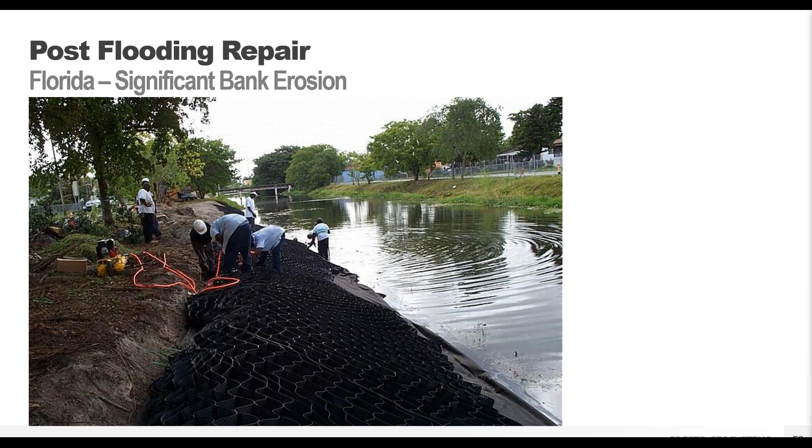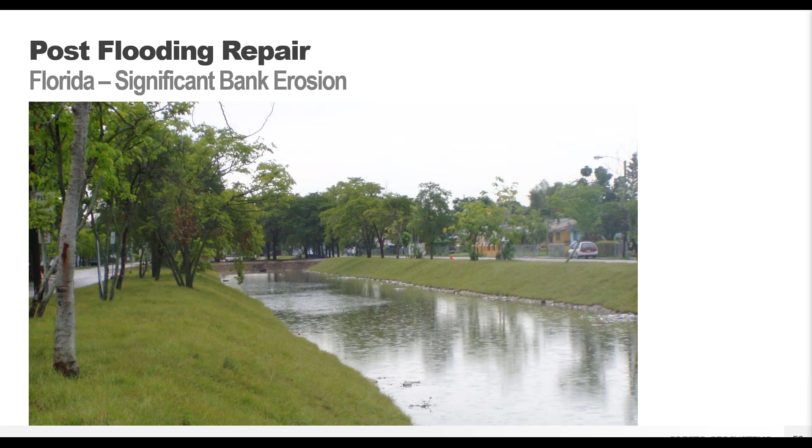Here you can see the final surface after the vegetation has been fully established—you don't even know the GeoWeb panels are there. It looks really natural. The performance of the GeoWeb allows it to handle fluctuations in water depth and the associated velocities and shear stresses, while still preventing erosion on the side slopes. Using a soil and grass type local to your area, maybe even salvaged materials from the excavation process, helps blend the system in so the panels aren't noticeable. But now you can walk along that shoreline without fear of sinking in, and it's protected against erosion for years to come.

Channels can also be filled in with aggregate or concrete. Stone infill might be appropriate if you're in an arid environment or don't believe vegetation is going to grow in your area. It's also important to keep in mind that vegetation usually can't grow in water, so if your channel has a consistent water depth, stone infill may be required underneath that mean water level.

Concrete infill is going to be the go-to choice when you know you're going to have extremely high flows, so there are no restrictions in terms of flow or shear stresses when concrete infill is used. If you're on a really steep slope, or working on your 100-year storm event, concrete might be the best option. You can even add baffles or energy dissipators to the GeoWeb channels with no detrimental effect to the system, to help slow those high velocities if you're going into something like a stilling basin.

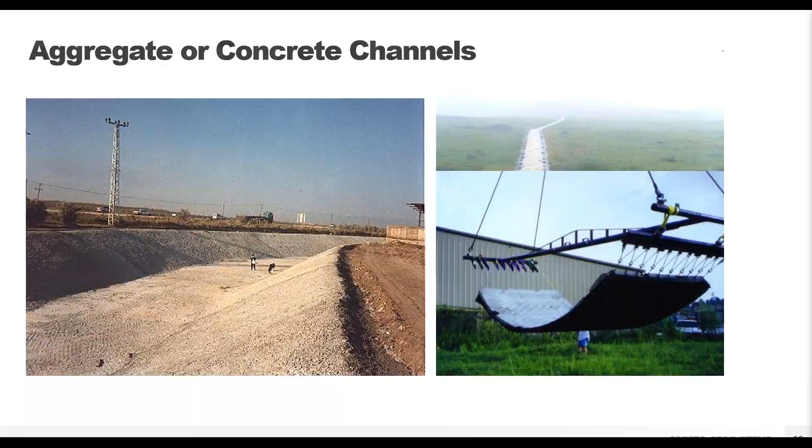This stormwater channel project was in Florida and shows how the GeoWeb retaining wall system can be used in those water flow environments as well. The stacked system can be used in urban areas where there's no room to lay back the side slopes, giving you more volume in the same footprint, great for roadways and highways.

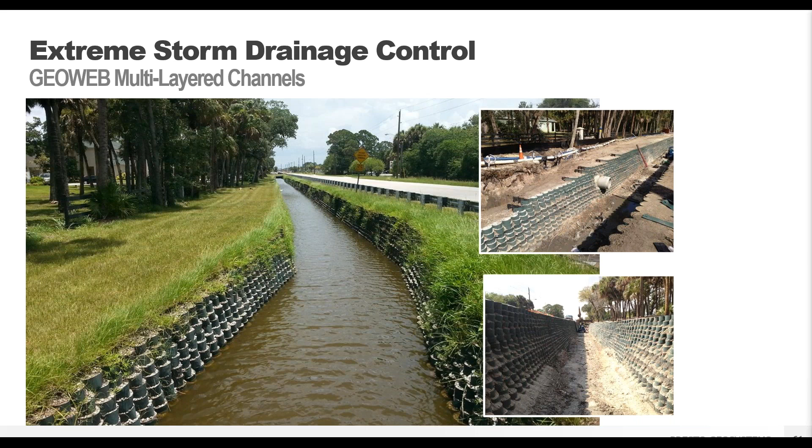In this case, vegetation was used above the mean water line for a natural look, and concrete was used below the water line to help resist scour and erosion from constant water flow. So you have flexibility in infill materials - concrete on the bottom so there's no erosion or scour, and vegetation above the water line for a more natural look. Whatever you need for your site, we can usually help with and give you that flexibility.

The GeoWeb system can also be used in conjunction with riprap if there's potential for very high flows, but you're still hoping to use vegetation. This was a culvert outfall in Milwaukee, Wisconsin. Stronger surface protection over the panels, such as a coir fabric, can also be used to help withstand high flow events, and this was intended for short duration events rather than continuous flow.

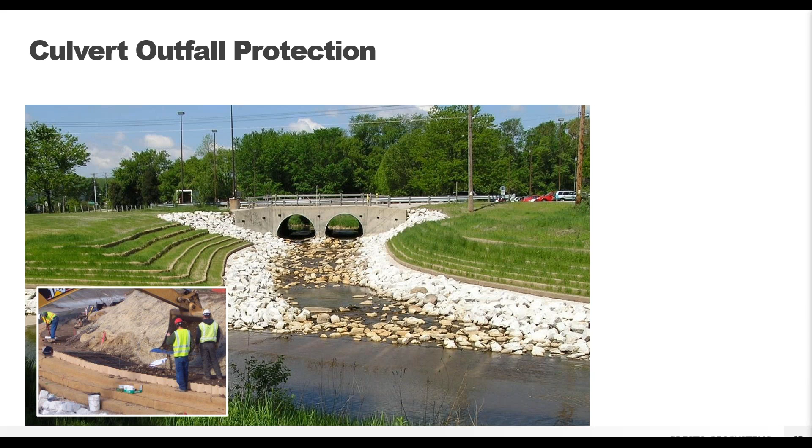This is just showing there are lots of different options. So whatever your project needs are, we really do urge you to come to us, talk it out, see what we can offer. There's no one right solution - there are lots and lots of potential solutions, and usually we can find something that's going to work for your specific needs.

The flexible GeoWeb panels can also easily accommodate things like culvert pipes or other obstacles so there are no gaps in your protection, including things like sonotubes. It also allows for the addition of guardrail posts, which is pretty common.

We hear from contractors how easy it is to install the GeoWeb system, even if they've never worked with it before, and how it goes in much faster and easier than things like gabion baskets or H-pile walls. We have written installation guides and tutorial videos on our website, as well as providing on-site or personalized virtual assistance when required, so we're going to work with you to make sure you and your contractors feel comfortable using this type of system.

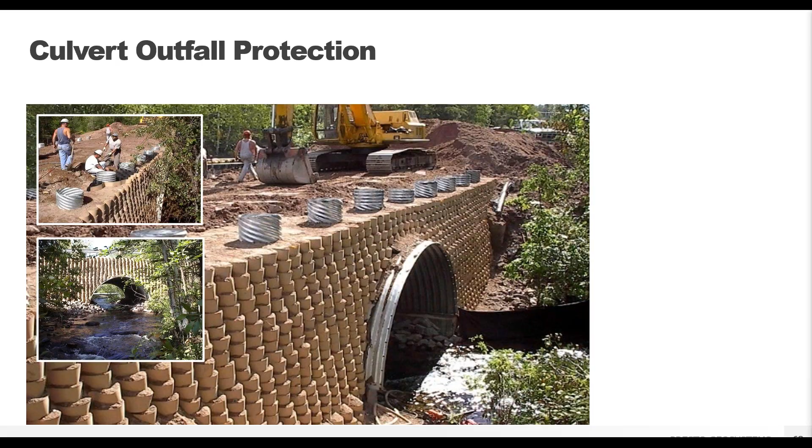In summary, every project is different, but the GeoWeb system has a solution that's going to be right for you. The GeoWeb system can be added to road projects to provide a more stable and longer lasting surface course for unpaved layers, reducing maintenance and repairs. For paved surfaces, it can decrease the pressures on your subgrades.

On slopes and in channels, you can guard against erosion, or you can even build up retaining walls, both for freestanding walls or for stormwater channels where there's going to be water flow. There's a lot of flexibility - we can meet your project needs, and it is a complete system solution for ease of installation and peace of mind.

Part of our complete solution is our technical assistance. This is where I come in, the engineering team here at Presto. We work closely with landscape designers, engineers, and contractors, offering a free project evaluation service for any type of road, embankment, erosion control, or any type of project really.

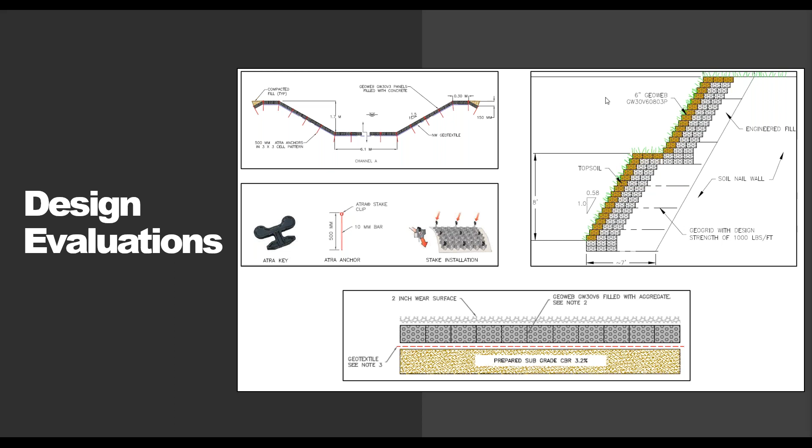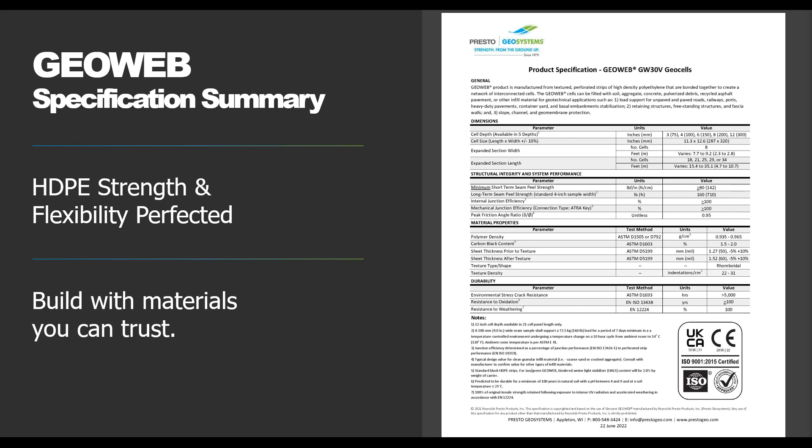We do deliver quality and over 40 years of expertise, guaranteeing each shipment meets or exceeds our specifications so you can deliver certainty and build with materials you can trust. No disclaimers, no concerning fine print.